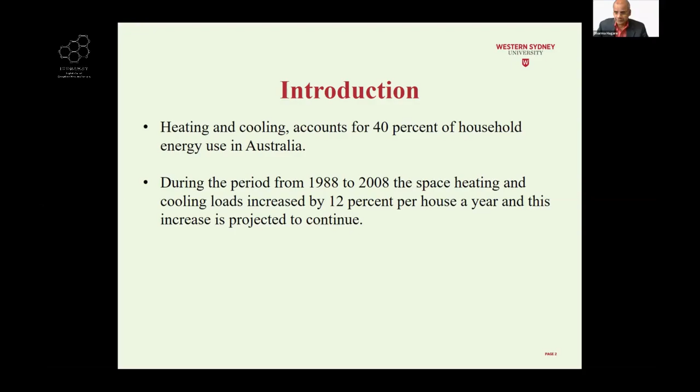So if you look at the total energy consumption within the house, space heating is around 40%, and water heating is around 23%. Appliances like cooking and other appliances account for around 30%. And then lighting is around 7%. So lighting is a very small fraction of the entire energy required within a house.

So the space heating and cooling is the main, the majority component, which is around 40%.

Now we can use some passive strategies for reducing the energy load, particularly on space heating and cooling. That is, something to do with optimizing the building materials by using higher thermal mass with the floors and walls, and also better insulation.

Now, especially in the eastern part of Australia, building orientation is very, very important. The orientation will help you save energy, particularly during the winter time. And you need to have an appropriate windows to wall ratio. This is what exactly is mandated by BASIX in New South Wales.

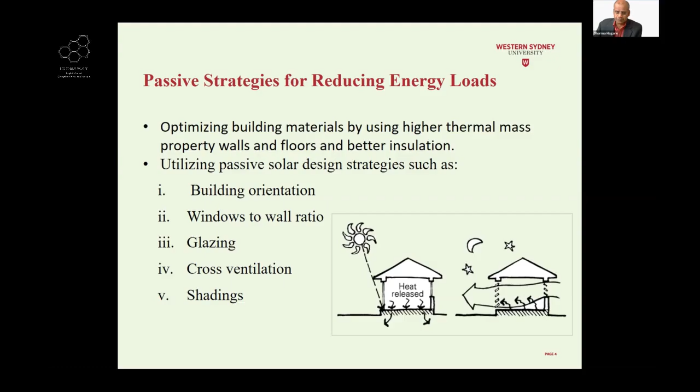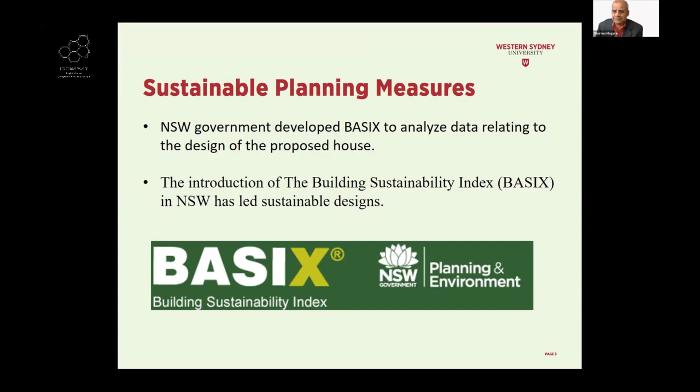Now, I think a lot of us are familiar with this, the Building Sustainability Index, BASIX. It basically gives us some credits based on the design of our residential houses. We need to maximize energy conservation using some of these guidelines, and as you all know, we need to get the BASIX certification before we start building any new house.

Now, when designing a house, identifying the climate zone is very important. Australia has got different climate zones depending upon the location of where you are.

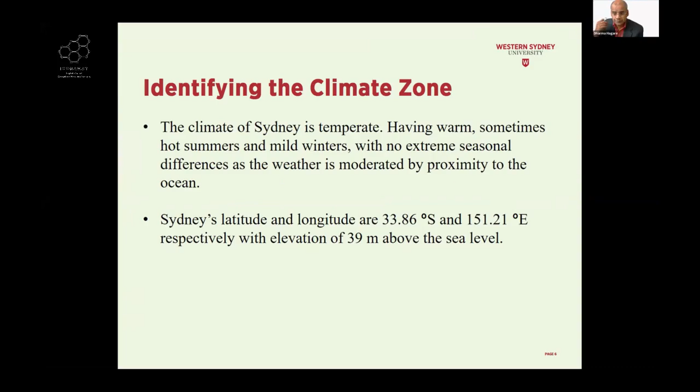So something like this: you've got a hot and humid climate on the top end of Australia, like in the case of Darwin, whenever you listen to the news, you always see around 33 degrees centigrade, which is the hot and humid condition throughout the year.

And then if you go towards the eastern side of the country, you'll get into more of a temperate condition, which is cooler weather, and also very nice weather conditions for better living, I suppose. Along with that, you have well-defined seasons, the four seasons.

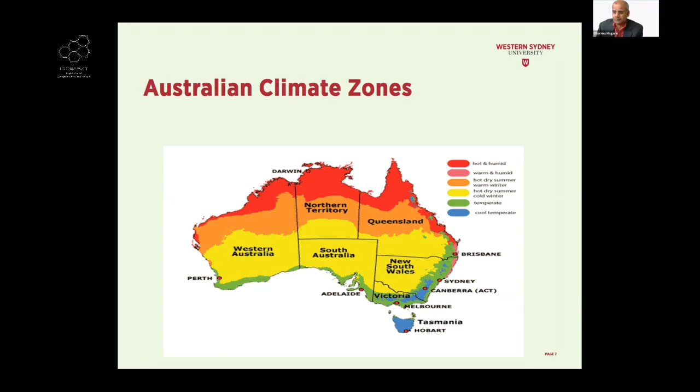So during the winter time, you would like to have some heating arrangement within the house, and during the summertime, you will have some cooling arrangement within the house. So the heating and cooling comes into picture on the eastern side of Australia. As you know, Australia is a big continent, so we've got different weather patterns depending upon where you are in Australia.

The materials we looked at were some of these old, low thermal mass buildings, which include the Fibro house, raised timber floor, and Fibro house with better flooring, where we considered some kind of tiling of the flooring system. So we included this old type of Fibro houses, and then some new constructions, which include brick veneer, reverse brick veneer, and double brick walls. So we divided all those into about 10 scenarios.

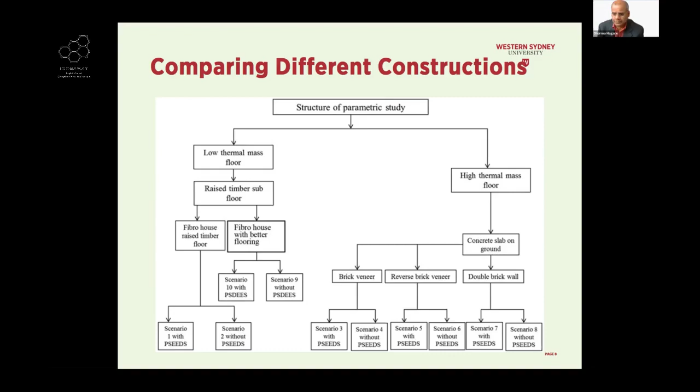Now, what exactly do we mean by PSEEDS? PSEEDS is passive solar energy efficient design strategies. So house with PSEEDS and house without PSEEDS. House with PSEEDS we consider as an improved house, which includes double glazing with a certain U value, orientation northern, shading devices, internal integrated window shading devices, and also ventilation, meaning we are assuming here that houses with PSEEDS have a low level of air leakage into the house.

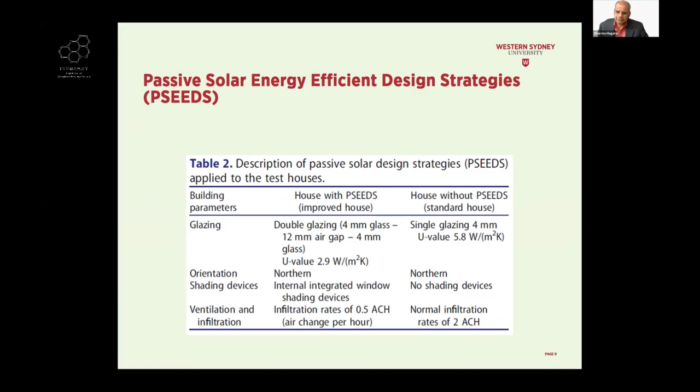Whereas on the other side, we have got a house without PSEEDS, where you have a single glazing system. Here again we are still looking at northern orientation, but no shading devices are used, and normal infiltration means there is quite a bit of infiltration of air into the house. Here we are looking at 0.5, and here it's 2, almost 4 times higher. So there's quite a bit of air leakage in these houses without PSEEDS, and all the glazing is a single glazing system. That's the difference between the house with PSEEDS and the house without PSEEDS.

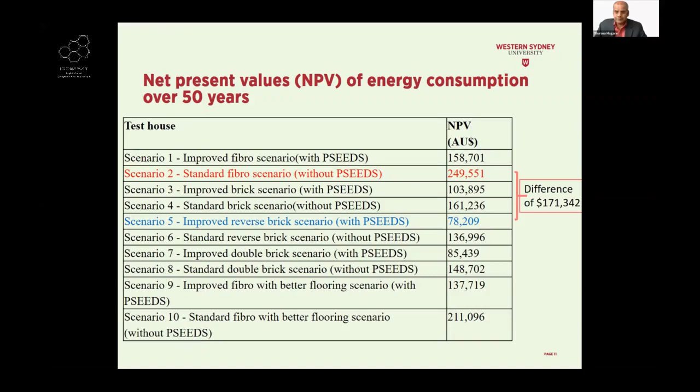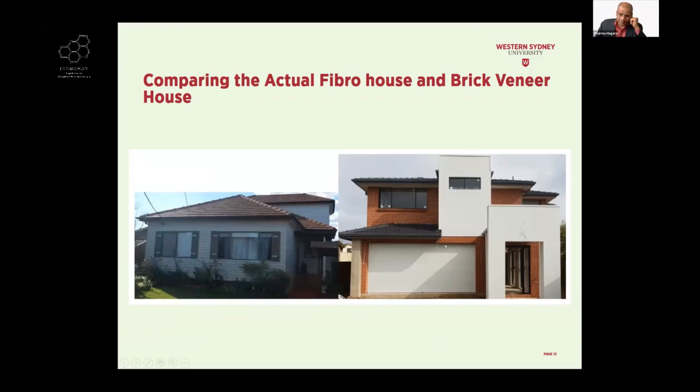We also did some real life comparison. So we got 2 houses here, at the same place. There was a Fibro house that has been replaced with a brick veneer house. We considered this as a case study, and we looked at the electricity charges for both houses.

We compared the electricity usage per meter squared per day, for winter, spring, summer, and autumn. You can see that in winter and spring, there's quite a bit of reduction in electricity usage for the modern houses, if you're looking at kilowatt hour per meter square per day.

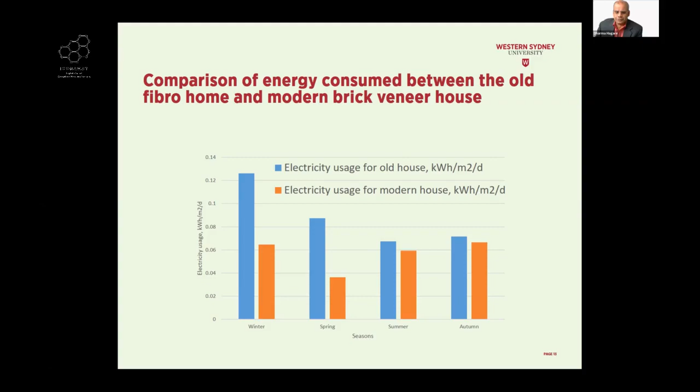So that does indicate there is a saving by going with new modern construction compared to the older houses. We looked at the overall savings in electricity usage: the old fibro house was 31 kilowatt hour per meter square per year, and the modern brick veneer house was 23 kilowatt hour per meter square per year. The saving was almost 35%.

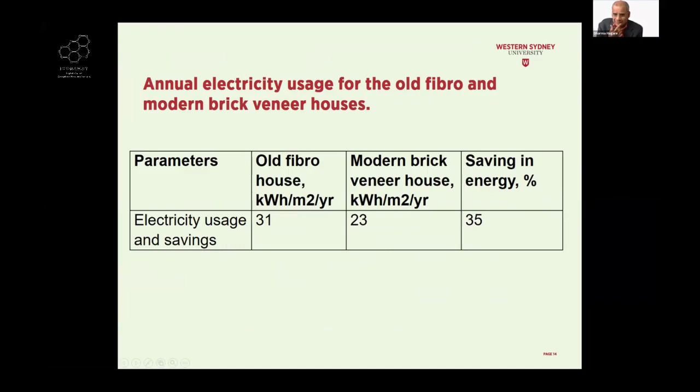So in conclusion, both the real data and the simulation data seem to indicate that modern brick veneer houses can save between 35 to 50% in energy consumption compared to fibro houses.

We'll be able to achieve this reduction in energy consumption that will result in cost savings in the energy bills. And I'm sure these savings will increase as the power bill rates go up. So it will make sense, to some extent, to replace the old fibro house with a new brick veneer house. Again, this is only based on economics, but we haven't really considered the environmental issues yet.

So environmental issues: reducing energy consumption can result in carbon emission reduction as well, and there will be more comfort in living. There are social benefits and environmental benefits, which, if you consider them, it definitely stacks up in favor of using modern construction to replace our old buildings.

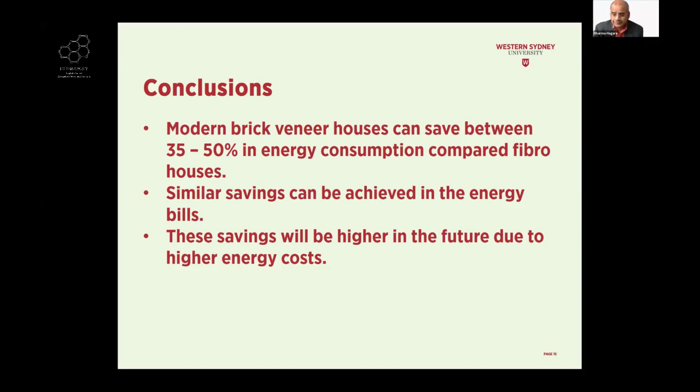There are a couple of papers we have published on this. I think you can access some of these. Okay, that's all I wanted to say. Happy to take questions if there are any.

It's a cost. See in this one, can you see my table? So in this, what we have done is we have considered the cost of the energy for the next 50 years, and also in the case of PSEEDS, the passive solar design strategies, we have also included the cost of implementing shading devices, double glazing, and some of those things.

All right, so this is actually going to be added to the final value of a property if we're about to save some energy. Is that correct? Yeah, that's right.

So in the case of the improved reverse brick veneer house, the cost of energy for the next 50 years is $78,000. Whereas in the case of the standard Fibro house, the second scenario, it's $250,000, the highest. The difference between those two is basically because of high energy costs in the case of the Fibro house.

Yeah, thank you so much. Thank you.

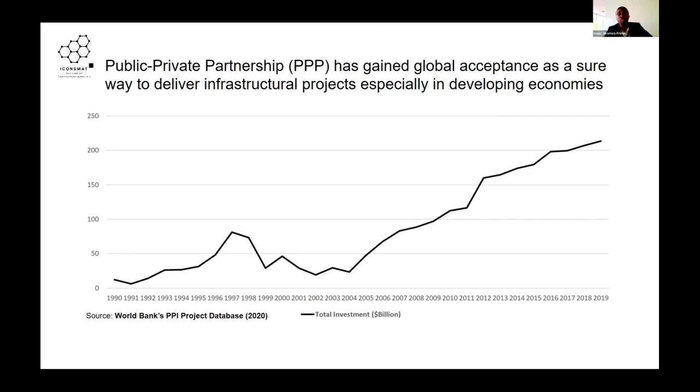The common feature of this model is that normally the private sector and the government share the risk, and the profits and losses that come out of the project are also shared together. As you can see from this World Bank data, over the past 30 years there has been a rise in acceptance of this model in developing public infrastructure projects, especially in the developing world, where it is very difficult for governments to get finance to support their infrastructure projects.

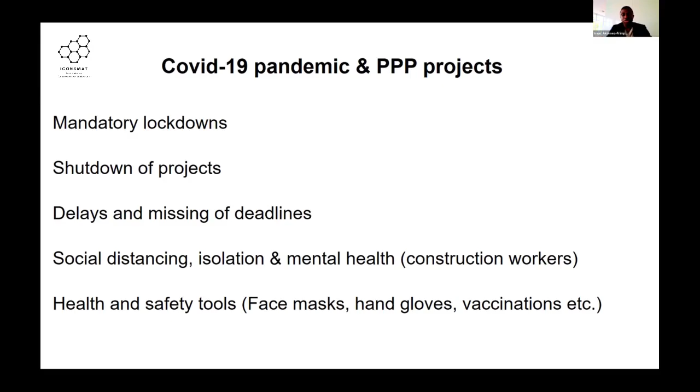However, since the COVID-19 pandemic, this issue of governments getting money has become very difficult. The reason being that during the pandemic, we have all seen mandatory lockdowns, shutdown of projects, delays and missed deadlines, social distancing, mental health issues, as well as health and safety tools. All these things have led to an increase in the way projects were executed in terms of the finances and the losses that come out of projects.

These things have really affected projects in terms of increasing the cost of executing projects. So in this study, what I did is decide to find out what are the key financial risks or key financial losses associated with PPP projects, especially in this COVID-19 pandemic, and then I wanted to find out the measures we can put in place to solve these problems.

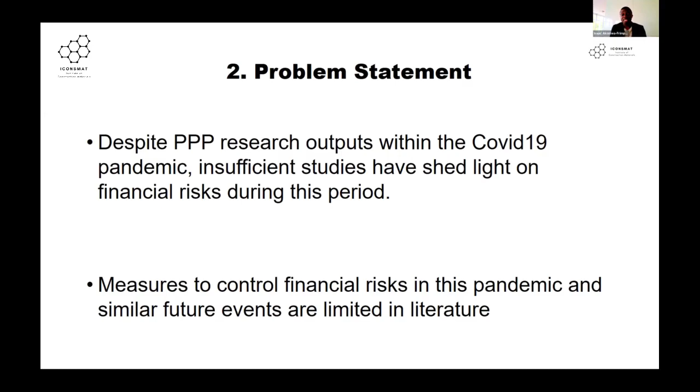And then even the ones that maybe 20 years, 100 years, or so many years from now will also come. So the aims and objectives of this study are to analyze the financial risk of PPP projects in this COVID-19 pandemic. The two objectives are to identify the critical financial risk of PPP projects in this era, and to highlight the control measures for practice and future research on financial risk of PPP projects.

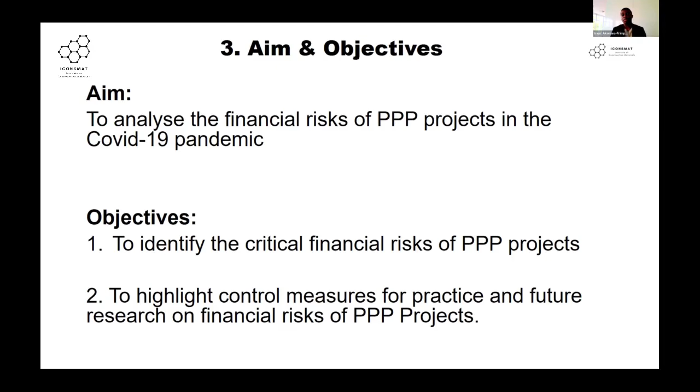And then I did some content analysis, and out of that I extracted some key variables and statements from this literature. Literature were taken from Scopus, Web of Science, Google Scholar, and PubMed.

So the second step was that I designed an online survey, because of social distancing you can't get access to people physically. I collected a number of emails, I'm talking about PPP experts, and I sent these emails to them with the links, and made them answer the survey.

And then after I collected all the surveys, I did a factor analysis, PCA. I must confirm that this study is still ongoing, so these are the initial results that I'm going to present. It's still an ongoing study.

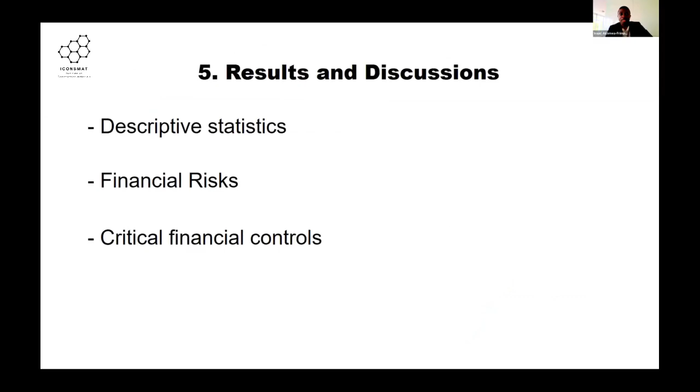And then I showcase the results. The results I grouped everything into 3 using factor analysis - I'm talking about the financial risk, economic factors, environmental factors, and the social factors. So this is the results out of the study.

The descriptive analysis showed that these are some of the authors who are contributing to this study, that was the literature review. And you can see some of the names here, A.P.C. Chan, Osei-Kyei, and then other people who are into this study.

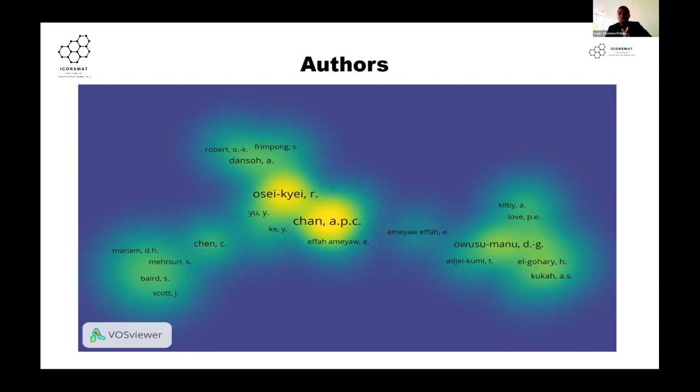The reason being that because of COVID-19, some of the loans and capital that they contracted to construct these projects, they have not been able to finish because of delays and setbacks. Therefore, projects which were scheduled to be completed and then start operating, so that project managers will get money out of the projects, have not been completed, therefore increasing the interest risk.

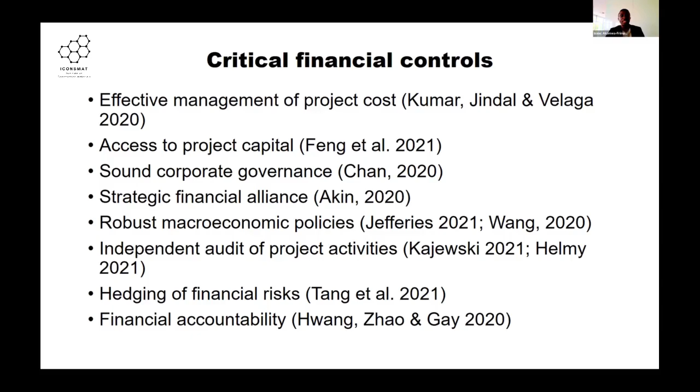And then other things that they suggested, as you can see from here. So the conclusion from this study is that from what I discovered, it seems a lot have not been done as far as this issue is concerned, and the few cases cover only a few countries.

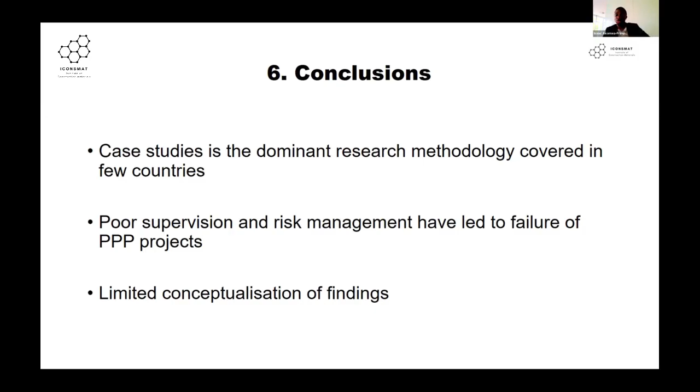So going forward, I propose that researchers look at this and cover this issue in many countries—especially countries where COVID-19 has wreaked havoc. I think that this issue must be looked at. And then poor supervision and risk management should also be looked at, along with the limited conceptualization of this issue.

The implications of this study are that it could be a guide for project managers to control financial risk of PPP projects. And this study will also further studies which other researchers are going to look at.

And then policy implications—financial risk, coming from the discoveries I got from the literature and the experts, is a very prominent issue which policymakers must look at going forward, especially relating to health and safety. So it's something they have to look at and then design policies on.

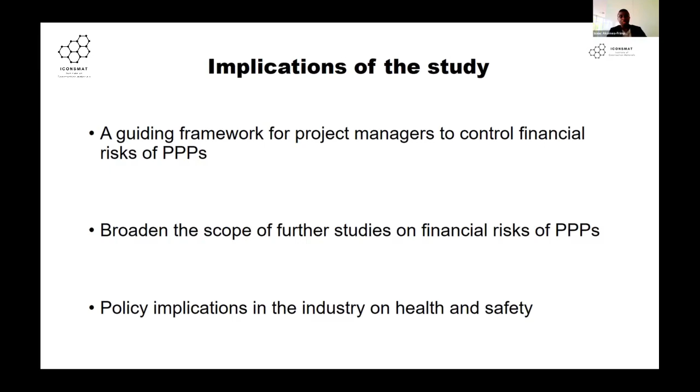I have a question though. So for your research, you found that only a few countries have been publishing research about the implications. Do you think it's because of other countries' policies with public-private partnerships, or is it just really strange that so few countries and universities are looking at it and publishing it? I know it's a really new kind of thing, but the construction industry really drives the economy, especially in Australia—it's such a big thing for us, and I know it's a big thing overseas. So it's just so strange that you're saying it's like 6 universities and 3 countries. Do you have any insights as to why it's just these 3?

Okay, I think it's because the pandemic started early 2020. So I believe that as time goes on, like post-COVID, we'll see so many studies, because I think some people are still waiting for the outcome of the pandemic, the results, since we are in the middle of the pandemic and don't really know the results.

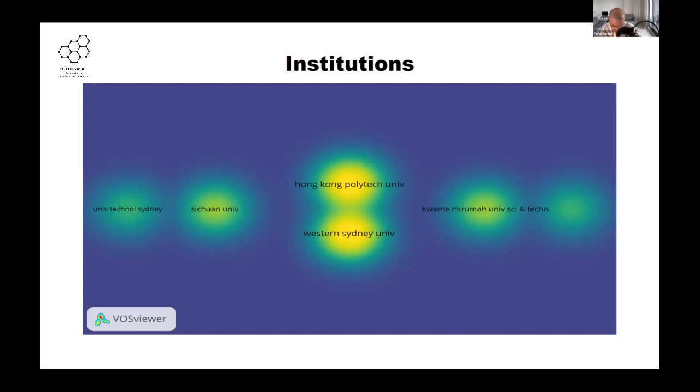Now, considering the amount of funds that the Australian government is currently injecting into construction projects in terms of subsidies, what is your prospect for the future of the interest rate?

I believe that with the support the government is giving to the economy, in the long run it will help reduce the effects of high interest risk, especially relating to construction materials, because interest risk and inflation risk tend to affect construction materials. So if the government continues to support construction industries and the entire economy with this money, I think it's going to help reduce the effects. That's what I'll say for now.

Thanks a lot. Thank you. Any other questions? Okay, thank you.

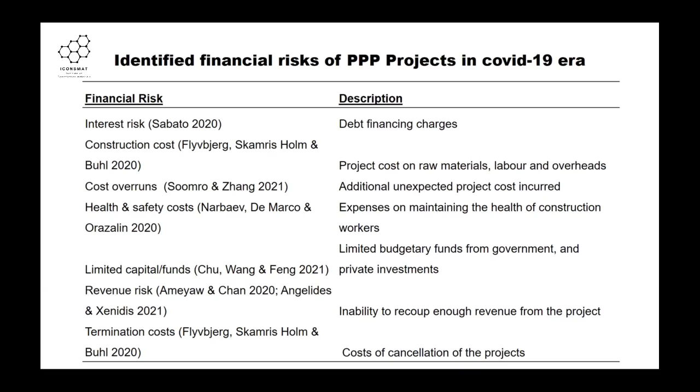If we have no more questions, I will introduce Farid. His presentation will be on the electrochemical exfoliation of graphene oxide for use in concrete products.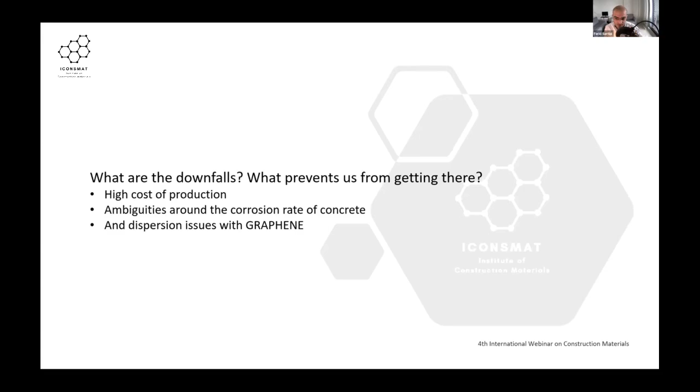Luckily, there is a much cheaper way of producing a material really similar to graphene, called graphene oxide. Graphene oxide shares a lot of similarities with graphene, such as high compressive strength and both high electrical and thermal conductivity.

In contrast, however, graphene oxide is not hydrophobic. Rather, it is hydrophilic, actually, because of the oxygen atoms, which means it not only doesn't create chunks of little black balls, it actually helps in better dispersion. That continuous path for electrical and thermal conductivity can be achieved by using graphene oxide instead of graphene in concrete.

From the comparison between the molecular structures, you can tell that graphene oxide yields relatively lower thermal and electrical conductivity than pure graphene because of the impurities embedded in its structure, which is both good and bad. It appears to be good for a lower corrosion rate and bad for conductivity matters.

Nevertheless, the major advantage of reinforcing concrete with graphene oxide instead of graphene is the affordability of this material, because after reviewing the literature, there has been no significant difference observed between the two in terms of mechanical performance in concrete. So basically, by using graphene oxide instead of graphene, you can save a lot and get the same outcomes from the mechanical perspective.

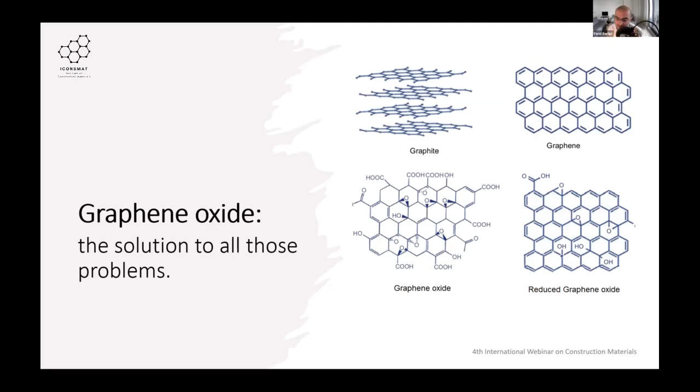There are two main methods of producing graphene particles, which I'll explain in this table. The first, cheaper method used to produce graphene oxide is faster compared to the other one. This is the method we actually used during the laboratory experiments. The second method is used to produce high quality graphene, which has applications in other industries such as electronics. That's just super expensive and not going to be viable by any means for construction applications.

Electrochemical exfoliation, the option we've chosen, refers to the process during which graphite sheets are oxidized in an electrolyte followed by ultrasonication. Hydrobromic, hydrochloric, and nitric acid plus sulfuric acid are typically used as electrolytes, of which sulfuric acid is proven to perform with the highest efficiency among other acids. So we used sulfuric acid for that reason in our studies.

In the beginning of the process, we lowered the concentration of acid to 2% in this study for exfoliation and also for safety matters. Starting off with a low voltage for a few minutes from the beginning of the electrolysis would allow the graphite to wet and prepare for proper exfoliation. The voltage applied could be ramped up after a while to speed up the process.

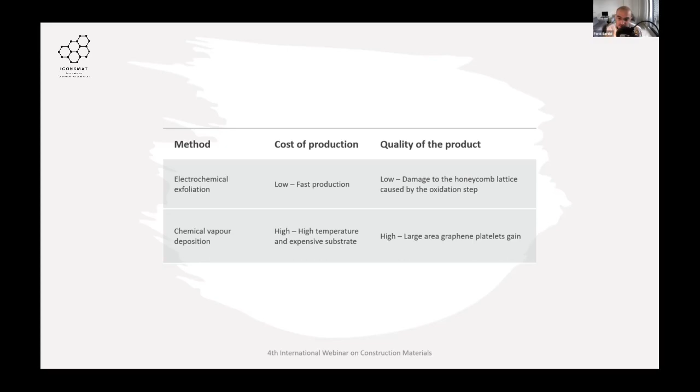I don't know if I'm running out of time. I guess I have 4 more minutes, so I have to speed up.

Cathodic exfoliation refers to the process where the positive terminal from the battery is connected to the graphite. We tried this method first, and there was no sign of exfoliation observed after 24 hours with a 6-volt DC current. Even 12 volts input didn't help the process.

The reason is probably the sizes of ions in the solution. Once the current is applied to the exfoliation bath, sulfuric acid decomposes into 2 major ions: 2 hydrogen and 1 sulfur.

This means that in the cathodic process, we've been mistakenly forcing the large ion, sulfur, to get between the layers, rather than pushing hydrogen, the smaller ion, inside the layers of the graphite. The more rational way was to force hydrogen to penetrate between the layers. So we corrected our mistake and switched the positive and negative electrodes.

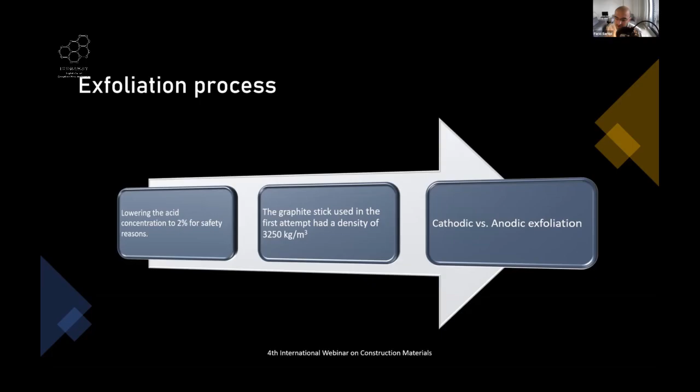We had 2 baths in our experiment. The other one was the ultrasonication bath. An ultrasonicator is an apparatus which shakes the solid particles in liquid solutions using high frequency vibration. Using that helped us collect much finer particles after filtration.

Since we are dealing with nanoparticles in this study, it was important to consider the right choice for the filtration process. The most frustrating step indeed was filtration, as it took the most amount of time in the whole experiment, 3 days until dry particles were ready to collect.

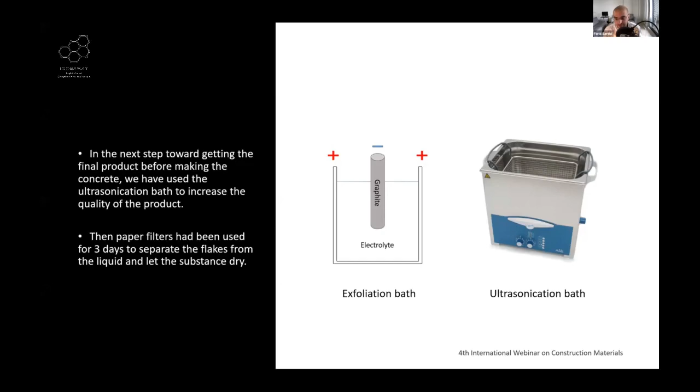That being said, it opens an opportunity for future studies. The question that arises is: what is a better filtration process to speed up production rather than spending 3 days to collect dry particles?

At the end of the production process, we managed to make 60 grams of this valuable product available for public purchase. Within the first few weeks it became available, we sold 10 grams online to one of our customers through the innovation store.

It somehow shows the existing demand in the market. Of course, we are not near full-scale commercialization by any means, but if you look at the market price and the number of studies done in this area, you can get an estimate about the possible return on investment in case you decide so.

The product is recommended to be used only for research and development purposes, as there are still many areas subject to more investigation. Some of those gray areas that can be noted at this stage are: number one, the quality of the product to be assessed by a scanning electron microscope, or SEM in short. This way we can outline which stage of production requires more optimization.

Number two on that gray list is the process that takes less time to complete. As mentioned, the current process takes 3 days for 60 grams of final product, which is not ideal. And to wrap up the gray list, we need a proper market evaluation done before commercialization starts, i.e. how many customers are striving to use graphene oxide in their concrete products.

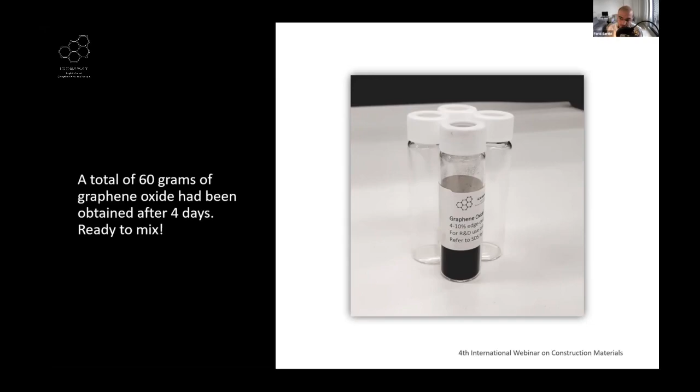Moving on, the concrete mix design. In the next phase of the study, we made cement mortar samples for electrical resistivity testing. This test was chosen mainly to outline how good the product is for roadworks, remembering that future roads are capable of charging electric vehicles on the way.

We have tried to keep the water to cement ratio constant at 1 to 3. A quick recap is that a lower water to cement ratio directly enhances the compressive strength of concrete, which is always a priority for contractors and builders.

The mixing process had been done in accordance with the Australian Standard Code. Cement and graphene nanoparticles had been mixed first, and water was added slowly in the mixer. The mortar had been mixed for 5 minutes, and 4 different samples were obtained at the end, as you can see right here.

To get rid of the air bubbles once poured in the mold, the samples had been vibrated for 1 minute and left in a water tank for curing after 24 hours for a duration of 3 days.

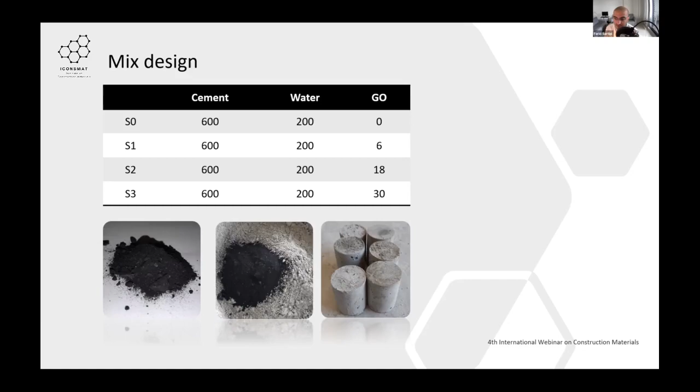Another interesting possible area for future studies actually returns to this very stage, that is curing, as we are expecting better performance even without curing. But in this study, in order to stay in the safe zone and avoid any further uncertainties, we managed to comply with the standard codes, especially when it comes to curing.

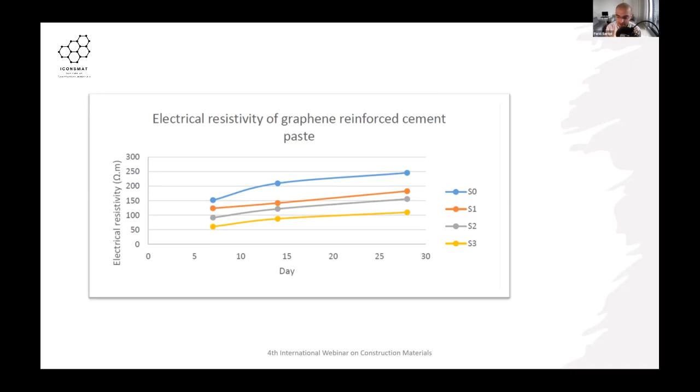This was a full summary of what we have done during the past scientific experiment, and I hope that you have taken at least 1 point for your future research studies too. I'll also be more than happy to discuss future collaboration opportunities with you. My email address for this reason is farid.rtp@iconsmat.com.au, and that was it. Thank you. If there are any questions, I'll be more than happy to answer.

So our first question is what's concrete? Concrete is basically a mixture of water, fine aggregate, cement, and coarse aggregate. And it's a hugely used material.

Due to global urbanization, economic development, and the growth of population, the demand for concrete is increasing day by day. More than 10 billion tons of concrete are produced everywhere, and it's the most consumed material after water in the world. Over 70% of the population lives surrounded by concrete.

Because of its versatile use, workability, strength, durability, longevity, and fire resistance, it's the most usable material in our part. But apart from this, it's also a harmful material for our environment. There are lots of problems associated with concrete.

More than 5% of carbon dioxide production, a greenhouse gas, comes from concrete all over the world. So we need to do something to reduce the impact of carbon dioxide.

So we are thinking about the use of raw materials, energy consumption, and water use, reducing them, and using waste material or byproduct material which are abundant in our environment. It comes from industrial products, so that we can reduce the impact of concrete.

But if you can see here in the graph, the cement production rate is increasing day by day. And in the cement production system, we are using a high heat system, really consuming a lot of energy, using huge amounts of water, and generating a lot of waste.

So for doing this, my study will basically show how you can reduce this carbon dioxide and use some industrial byproducts or domestic waste kind of things.

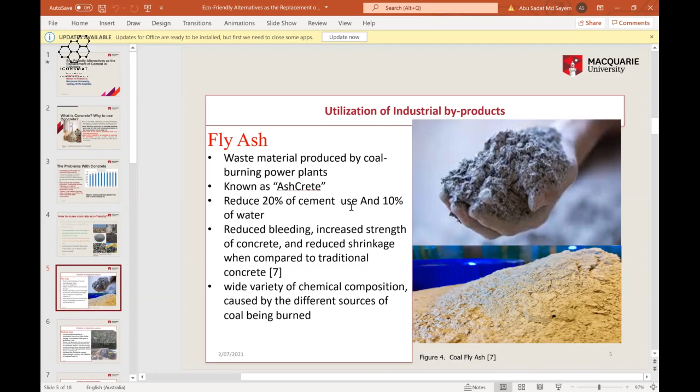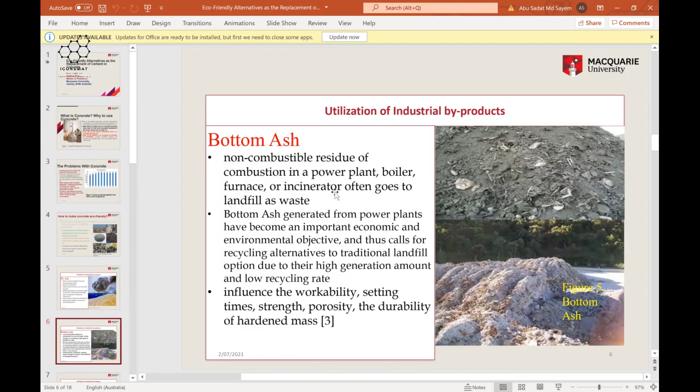Even for another industrial product, which is from rice producing countries, in the rice mill, by replacing cement we can get a 20% strength gain in concrete. To get the optimal result, this can be 20%, and it can replace 15% of cement in concrete.

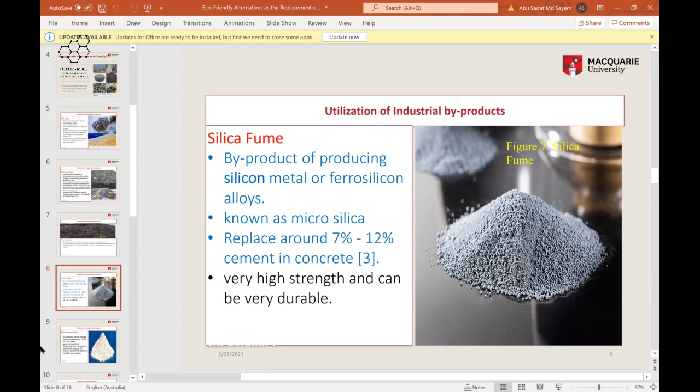We have another industrial product, that is blast furnace slag. It has a very good result compared to others. It can replace around 70 to 80% of cement, and it has very improved workability. In the long term, this gives very high compressive and flexural strengths.

This ceramic waste powder is an unutilized domestic waste, produced in huge amounts from the final polishing system in industry. It causes a lot of pollution in the soil, water, and air. But it has improved workability in concrete mixtures, and it can reduce the compressive strength development required time, while improving the durability characteristics of concrete.

Another study of mine focuses on waste tyres, which is the most challenging and problematic waste stream in terms of health and environment concern. It poses a good breeding system for pests and is a significant fire hazard. By using the waste as a crumb rubber aggregate, we can also use it as a cement replacement in the form of rubber powder. Although it has some reduction in flexural strength, it increases tensile strength. Lots of studies are going on here, and even in Victoria, it's implemented in roads as well.

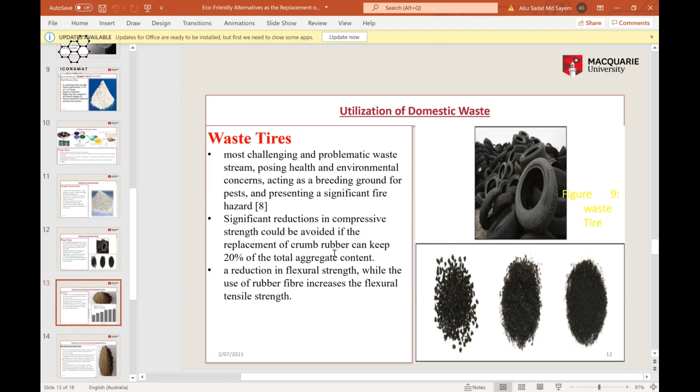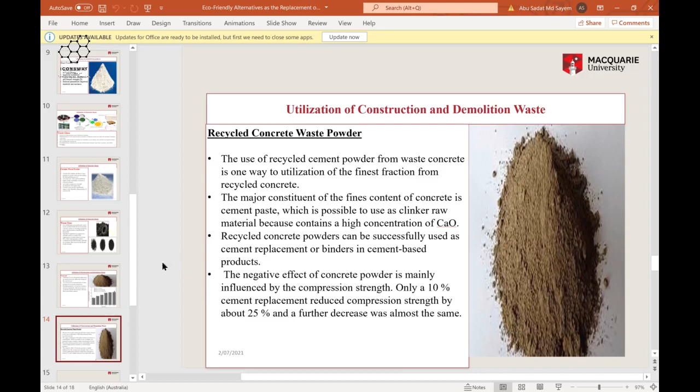So my conclusion goes through here: we need to reduce the amount of Portland cement so that we can use a lot of supplementary materials. We can use a lessened amount of cement and raw material, and use more highly recyclable material instead.

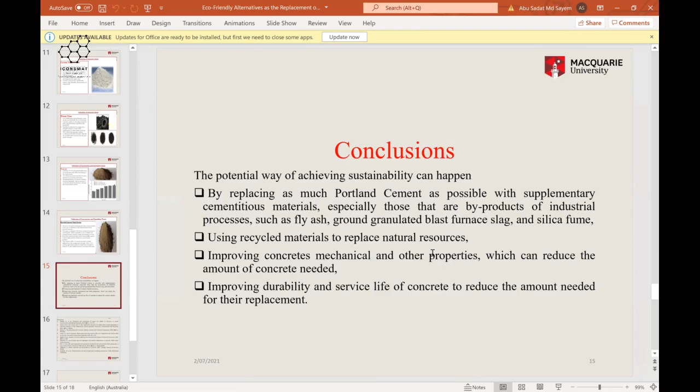Thank you, that was really great. Oh sorry, go ahead. Yeah, thanks Janice. Thanks Habiba for presenting this paper.

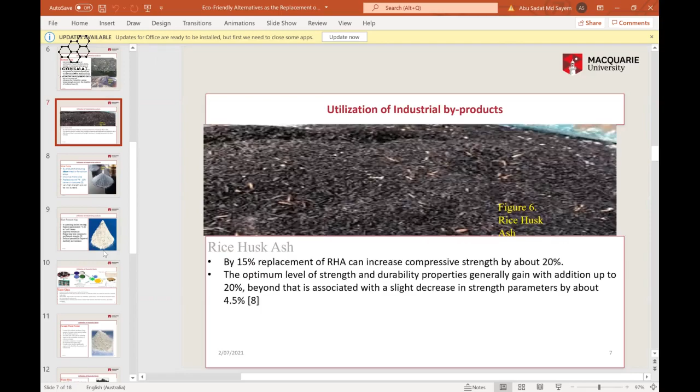It's pretty cool. Can I have a question regarding the wood ash? How can we use it as a supplementary material, or supplementary cementitious material? I think the wood ash is almost on the last slide, 14 or 13. It's basically from construction and demolition waste, the wood. So through this recycling process, we can make it into ash, like after burning, I think.

We can use the wood by burning it, like in a cement kiln, and we get that ash. I think from that ash we can use it. So basically it's like grinding, or used as energy, like a fuel, and after that we use that ash as a replacement of cement.

Yeah, but have you got this from any reference? Do you have any reference for this slide on wood ash? I didn't really add it here. Okay, so it's not in number 16? If you go to slide number 16, maybe? Yeah, no, it's not there. Okay, because we should know how the wood reacts with the cementitious material. I'm not quite familiar with this one. Anyway, nice presentation, it was nice brainstorming for supplementary cementitious material. Thank you.

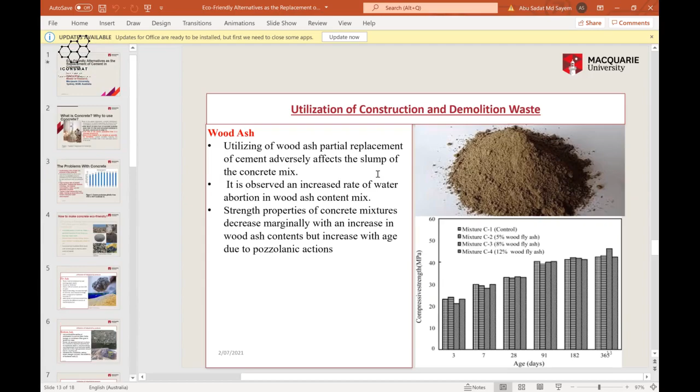I have a question. These are industry waste products - are they already being collected, or is it something you're experimenting on for future use in a more circular economy? It's already implemented and already being used. I'm working on environment impact analysis, looking at how we can be environmentally benefited, or how much benefit there is in the reduction of carbon dioxide. Oh okay, so it's already being implemented, but you're finding the statistical side. Yeah, okay, I understand, thank you very much.

Are there any more questions today? Can I ask one? Okay, thanks a lot, Habiba.

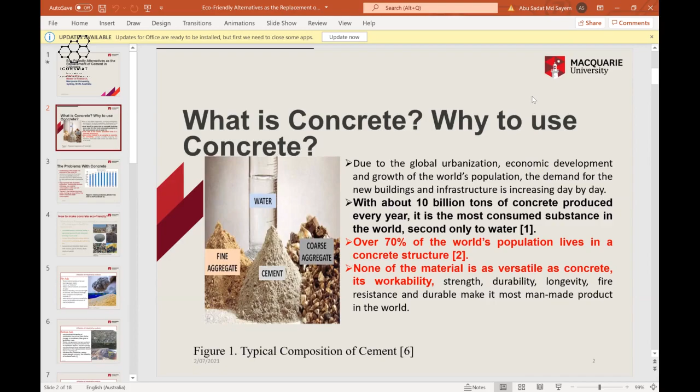I guess there was a comparison between a few supplementary cementitious materials being fly ash, wood ash, and slag. I've never tried that in a laboratory, and I wanted to ask whether there is a comparison between the compressive strength gained when each individual of these SCMs, supplementary cementitious materials, are mixed in concrete.

This is basically my literature study. I'm working on the carbon dioxide reduction system, and I'm working on a life cycle assessment. I see how much it can benefit us. I got this result, and I am implementing it in the life cycle assessment, but I didn't actually carry out this experiment.

Is there any quantitative comparison between these in terms of CO2 reduction? That's what I want to do. I want to make lots of concrete mixes, and then I will see which material is giving the more beneficial result in reducing the carbon dioxide.

Okay. So I haven't got my results yet. Okay, thanks a lot. Thank you, really informative.

Thanks for that presentation. I think it's really important that we're looking towards a circular economy. It's something the Australian government is already working on. It's a really topical presentation, especially since the National Plastics Plan only came out this year, and we're all working towards reducing our waste materials. Thank you very much, Habiba.

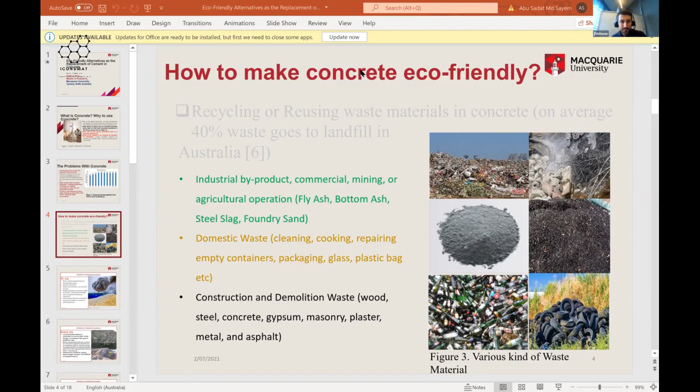So basically today my presentation is on reinforcing cement mortar with glass fiber using inkjet 3D printing technology. This technology has evolved since around 1993, from MIT University. According to ASTM standard, the American Society for Testing and Materials, additive manufacturing can be divided into 7 categories: VAT photopolymerization, material jetting, binder jetting, powder bed fusion, sheet lamination, and directed energy deposition.

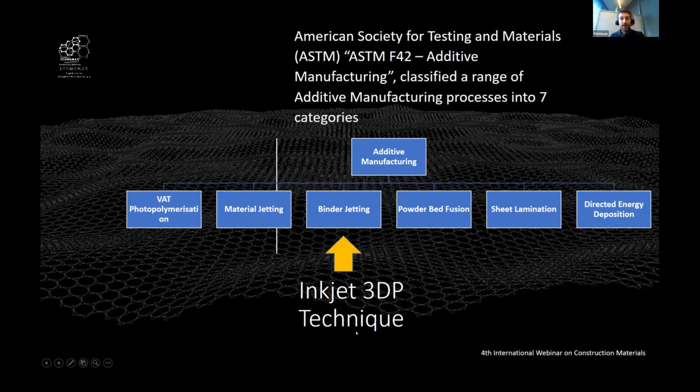This process actually takes longer compared to most of the other 7 categories I mentioned, because it needs cleaning. Once you finish your printing, you need to clean it properly until you get your subject or object.

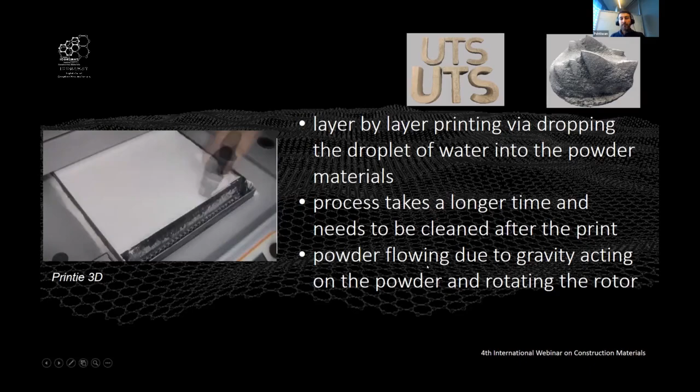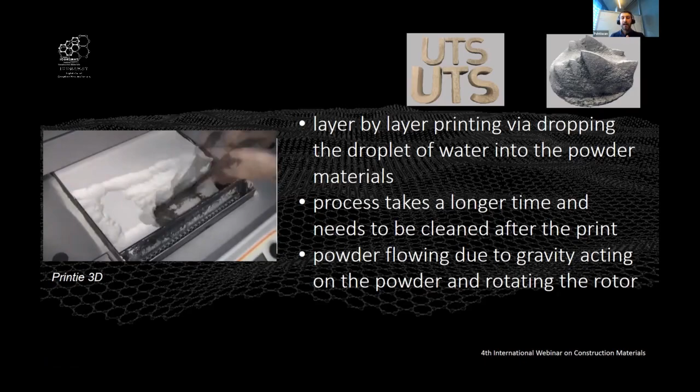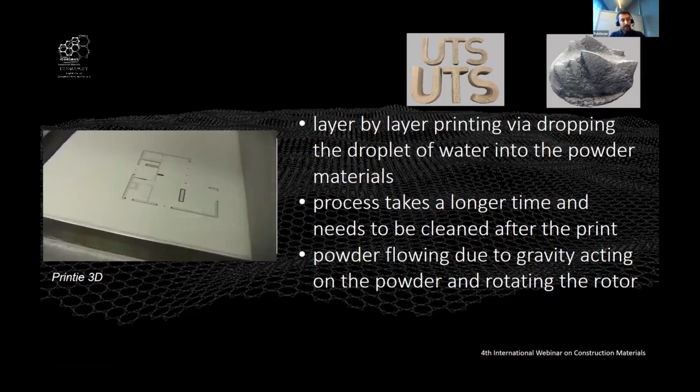The powder flows usually from the back of the printer, which, instead of paper like a normal printer, has powder coming out. This flows out acting on gravity and rotating - there's one small rotor inside a bucket in the back of the printer that helps the materials come out properly from the back of the printer.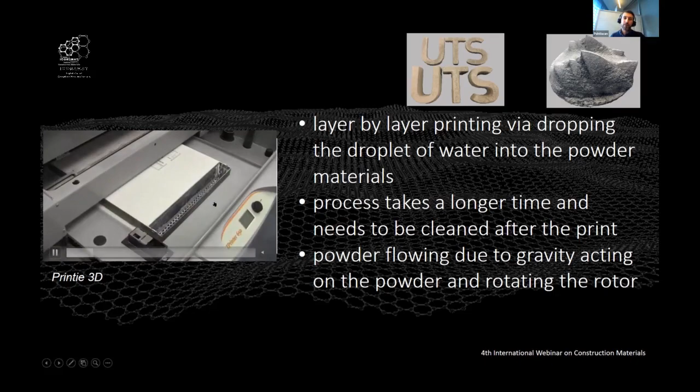The ones I showed earlier are usually made by 3D Systems, which was earlier called Z Printer. Now there are companies trying to produce large scale 3D printing technology for construction or other industrial purposes, such as Voxeljet. They have innovated large scale 3D printing inkjet technology, and the layer size of this printer is larger than the 3D Systems one.

This was developed with the UCLA architectural department in the US, and Voxeljet itself is a Germany company. They have made mini houses, like the one you see in the photo on your right, creating molds at a large scale - even up to 4 meters. This one is about 3 meters in height and around 2 meters in length. They have also tried making 4 meter houses, since the scale of the printer is around 4 meters.

However, it's not just Voxeljet - there are other companies like ExOne that have been using binder jetting for around 5 years, for a lot of industrial and manufacturing purposes, such as making engines or other parts for the automotive industry.

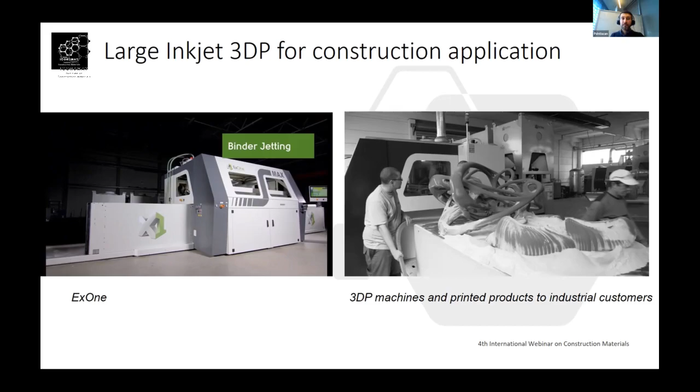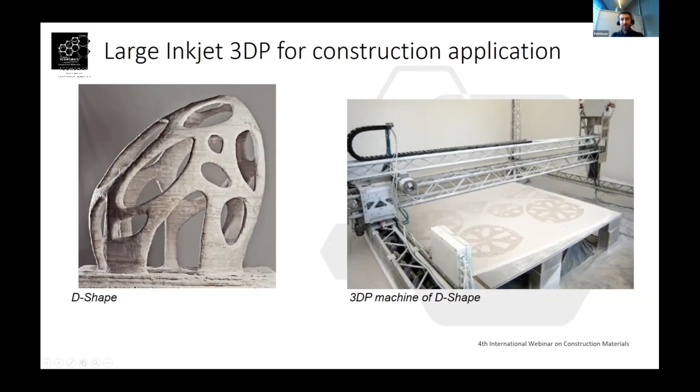So this is a general overview of large scale or large inkjet 3D printing, applicable for construction purposes. However, there is another printer custom made by Enrico Dini in Italy. He used his printer only for civil engineering or construction purposes, making irregular shapes which are very hard to make with conventional concrete or with the formwork available for construction. His company now makes the D-Shape printer, and recently they have done a lot of work, especially for marine structures.

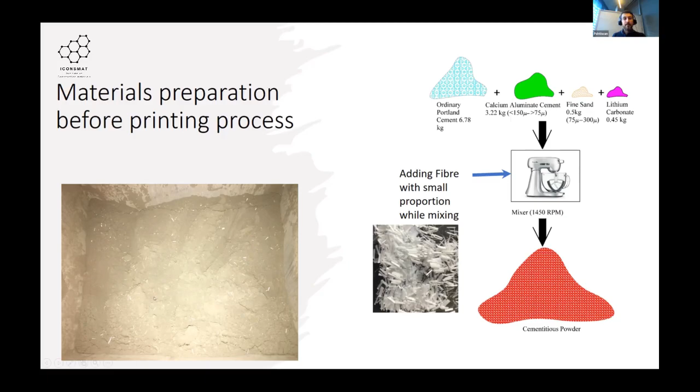Why do we add the fiber late? Because we don't want to damage the fiber. As you can see in these photos, the fibers all mix easily without any damage.

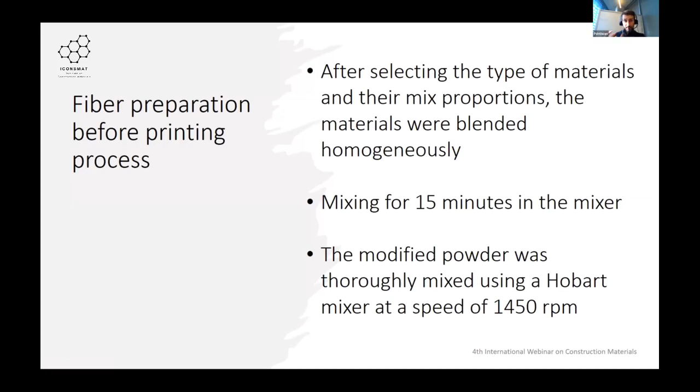However, the fiber preparation, as I mentioned, is basically after selecting the types of materials and their mixed proportion, the materials are blended homogeneously, and we need to mix for around 15 minutes. Usually the speed of the Hobart mixer is about 1,450 RPM. We can go up to 1,900 RPM, but if it's too fast it may damage your fiber, so we should be careful while mixing properly.

Regarding the mixing, it's not just the mixing itself - we need to see the outcomes. So how can we see the outcomes? We should check the surface roughness of the material on the build chamber and in a printed specimen as well.

So what we did basically is put the fiber material into the cementitious mix. Later on we checked it visually with photos or the naked eye, and then we magnified it using microscopy and 3D laser scanning. Once magnified, we saw most of the fibers were parallel to the y-axis in the build chamber of the inkjet 3D printer.

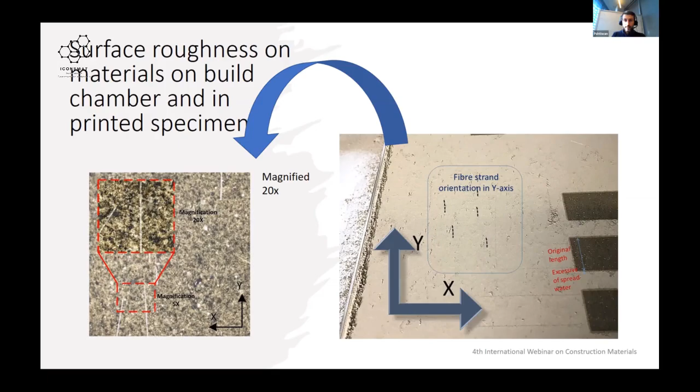Once printed, we also saw the materials were parallel about 70% or over 70% to the y-axis, and less than 30% in the x-axis. So basically most of the materials are in the y-axis, and when testing for mechanical properties, the bond of the materials is much stronger in the y-axis compared to the other axes.

So if we enlarge this, we can see the fibers coming out from the printed specimens. This test was done just for surface roughness.

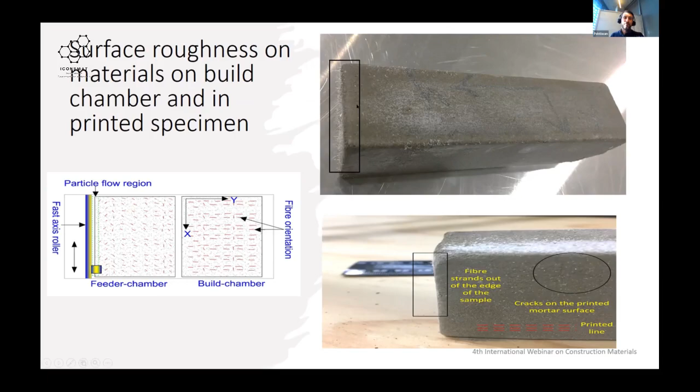Also, we measured the RA, the surface roughness measurement, using a 3D laser scanner to see what it looks like when checking the surface roughness profile. For the cementitious material printed without glass fiber, we saw about 22.31 microns of surface roughness for the printed specimens without glass fiber.

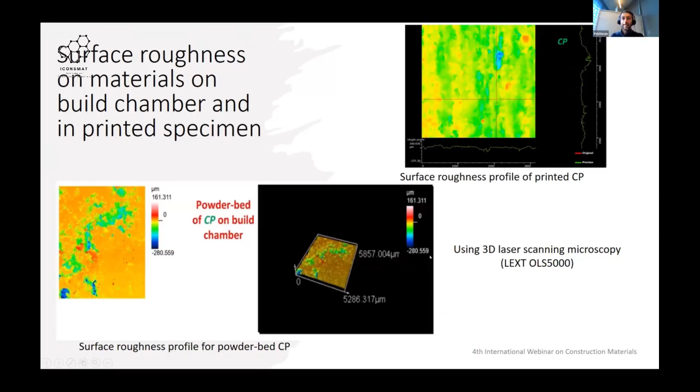But we also checked the profile of the powder bed, the cementitious material, on the build chamber as well. It is very high surface and non-homogeneous. This can also be seen in a 3D dimension, which is just an extra explanation.

But once we added 1% of glass fiber, the roughness changed from 22.31 microns to 18.57 microns. This means the glass fiber improves the material's homogeneity and surface roughness by about 20%. You can see the surface roughness of the material here, and it is quite good compared to the material that did not include glass fiber.

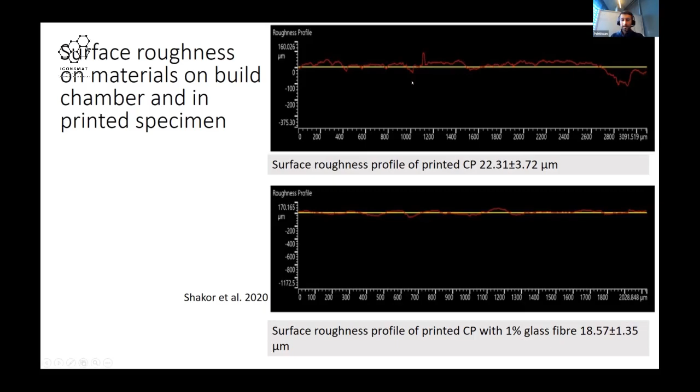Glass fiber is usually used as a reinforced material, which helps improve mechanical properties. In compressive testing, we got about 37 megapascal with glass fiber, compared to around 25 megapascal without it, especially in the XY direction. Because these printed materials have orthotropic properties, we have three planes we need to test, so we get different results when checking mechanical properties.

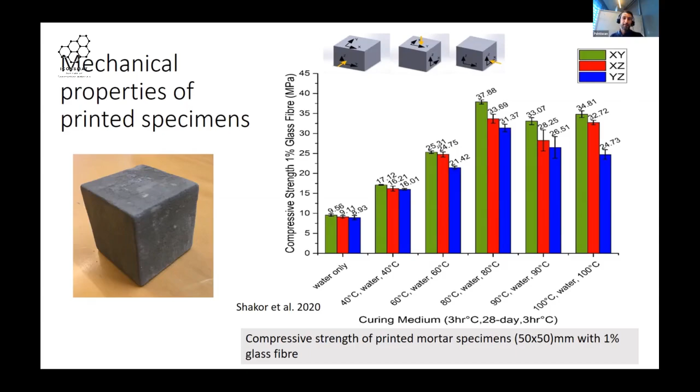However, for the printed specimen's flexural mechanical properties, we found that flexural strength can also be improved, but this improvement is not really too much

compared to the compressive one. In some cases, especially at lower temperature below about 70 degrees Celsius, we got very good results with samples that have glass fiber, but over that we didn't see much change. That's why we expect, when curing at a higher degree of temperature Celsius, we should be careful about the mechanical properties of the material. We got a maximum at 80 degrees Celsius, but the comparison between with and without glass fiber is not too much.

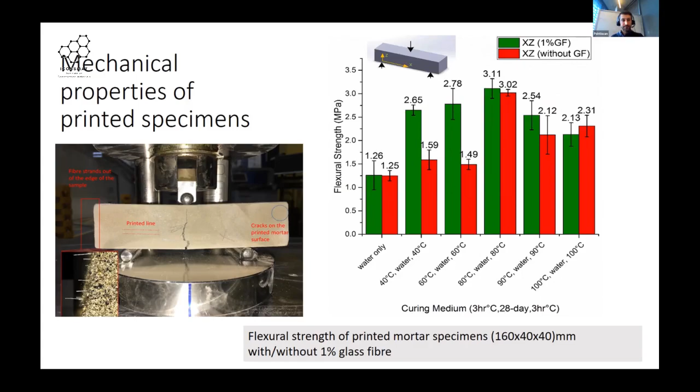Another point to check is the overall surface roughness of the printed material, which should be considered because it really affects the mechanical behavior of the materials. If we print any kind of material with different properties, we get different results. Because the cementitious material is not just cement, we are using sand and other kinds of accelerators, which most probably change the surface roughness.

But having 1% glass fiber is really helpful, so I highly recommend changing this ratio to see different results. If we print with 1% glass fiber, the surface roughness of the printed mortar improves by about 20%. Also, adding 1% glass fiber improves compressive strength pretty well, by 58%, or around 60%.

Also, regarding fiber orientation, using Image J analysis, we found most of the fibers are parallel to the Y-axis in the powder bed of the inkjet 3D printing technique. This can be figured out through Image J analysis.

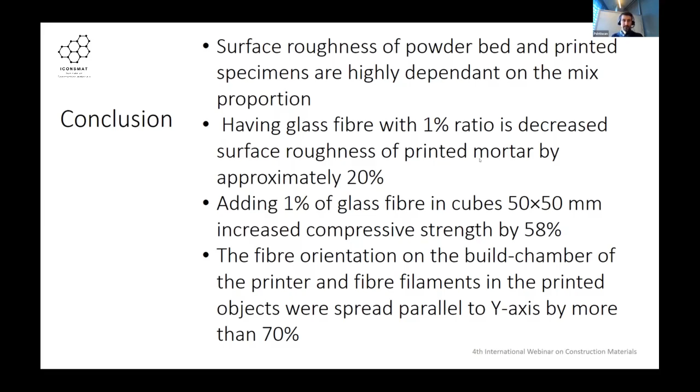Thank you for that presentation. I have a question mainly about 3D printing times. As the technology improves, and we've all been watching 3D printing over the last decade, with 3D printers coming into the consumer market for people to buy at home, would you say the limitation for this would be the size of 3D printers, the cost, or the time it takes to produce?

This is a very nice question, because most people are afraid of the cost. But if we don't have a competitor in the market, once there is competition, everything will be reduced down - the price of the material, the price of the printer - because when the normal paper printer was innovated, it was also very costly in the beginning, but later reduced because of different manufacturing and a lot of competition in the market. So at the moment the printers are expensive, but when more industry tries to develop different printers, the costs will be reduced down. This inkjet 3D printing technology is awesome for printing prefabricated, precast members - like precast houses, beams, columns, slabs, or staircases. It's pretty awesome to start with this, and I'm sure costs will reduce as more companies try to develop this printer.